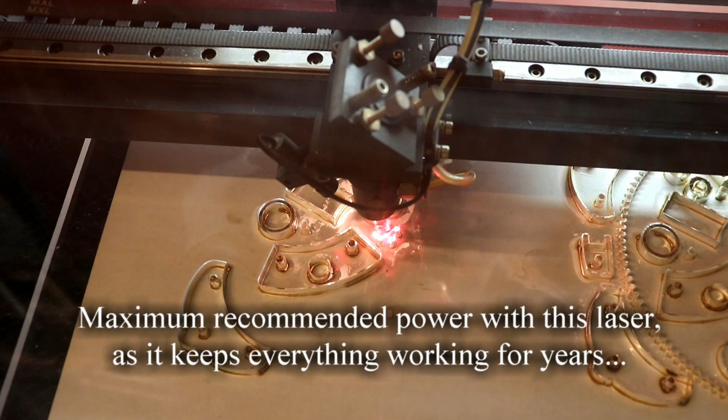The second important thing was resting 10mm acrylic on white card, any old bit of white card, for two reasons. If it's just resting on the honeycomb stuff, cut slowly at 1.4mm a second, 40% power, all the remaining laser shoots through the holes and tries to set fire to anything underneath, including the paint on the inside of the tray. Whereas sitting it on white card is fantastic, it absorbs the remaining laser power and bounces some back, giving a beautifully radiused edge all round. So the bottom half of all these bits will have edges slightly radiused.

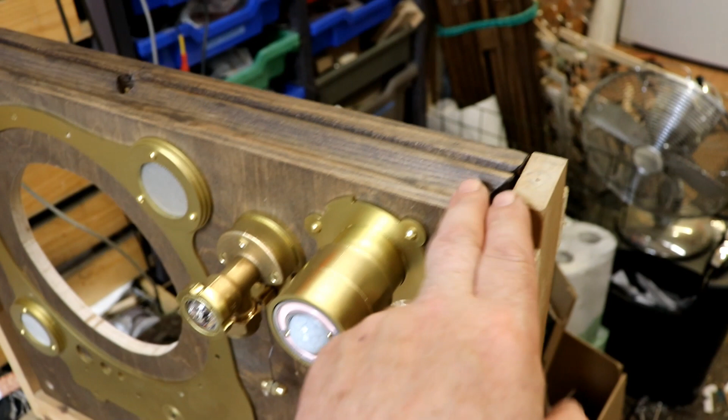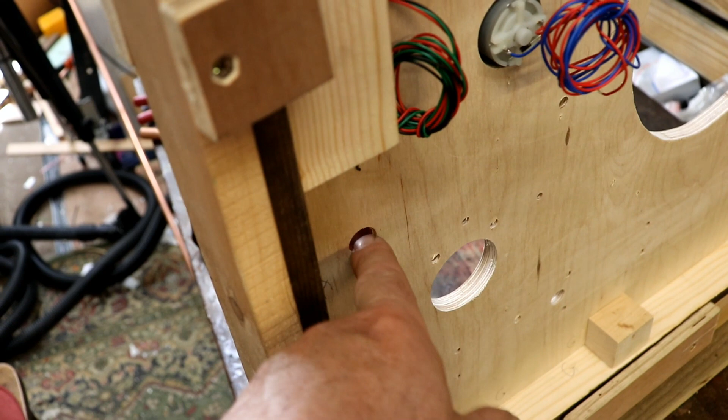In other developments, we have vertical barometric prognosticators. I went round the side and retrieved these two supports, which are really handy, because I'm now starting to work on the front and the back. I'm going to put that encoder thing in there, so that's very exciting.

All the 10mm bits are cut out, and I can't remember what any of them do really. I'm figuring it out very slowly as I go, trying to work out what all these little spaces and things are for. I'm just going to use one of them, which I think needs to fill the gap between the copper pipe and the clock body.

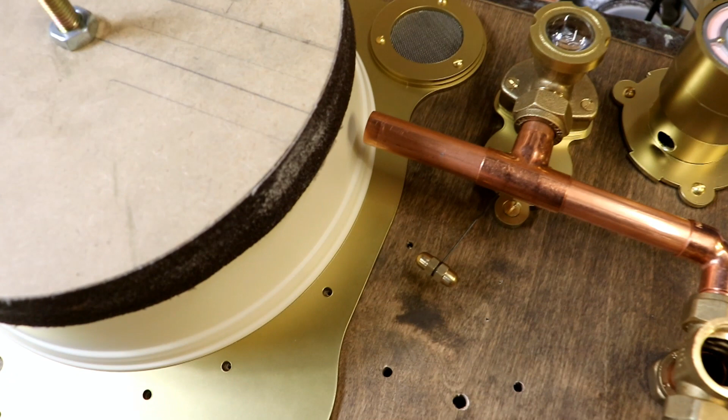But I have a jig, as always. Here's the jig, a disc with the same profile as the clock. I've marked it on, lined it up, and I can see that's absolutely perfect. So I can sand the profile I require on there, and line it all up with another part of the jig. Lots of jiggling about, excellent. I'm going to clamp that down, get it all lined up, and get back to you.

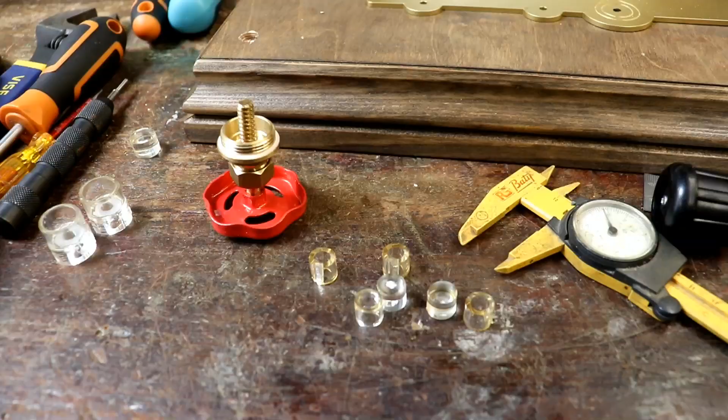Talking of sticking things together, which I wasn't, I've remembered how I'm going to support this on the end of that copper pipe to sand it. I think I'll glue that bit on. Also, the outside of this is just the right size to put one of those nuts on to hide the join, so to speak, which is how I did that one there, where the copper just goes into the board.

Right, and then making the adapters, the linkages that will link the end of that to the switch, which is buried somewhere down there. I've just done that math, and 13.8mm is the gap between the end of that and the end of the switch.

And now I've found all these little bits of 10mm stuff. There's a circular one that fits over that, then a solid one which is the link that makes it up to about 13mm, and then the funny shaped one with a flat on it that goes on the switch. You glue those three together, not like that. I'll do that twice, because I'm pretty sure that's how it works. It's lovely when these old memories come dripping back. It's great. Hopefully that will work, and I know they're all small enough to fit inside a piece of 15mm copper. There we are.

I've lined this up. Pillar drills are just so incredible, they really are, so versatile. I've lined that up with the line I've drawn on there. This is then going to spin round. I've taped that onto the end, and I'm going to slowly sand that. Let's try it and see. It's not twisting it around.

I didn't put this high enough, it hasn't done the bottom. Let's just, without twisting it too much. I'm an idiot. Just down the bottom bit. That's it. And then, oh, an idiot. Right, yeah, just enough. Yeah.

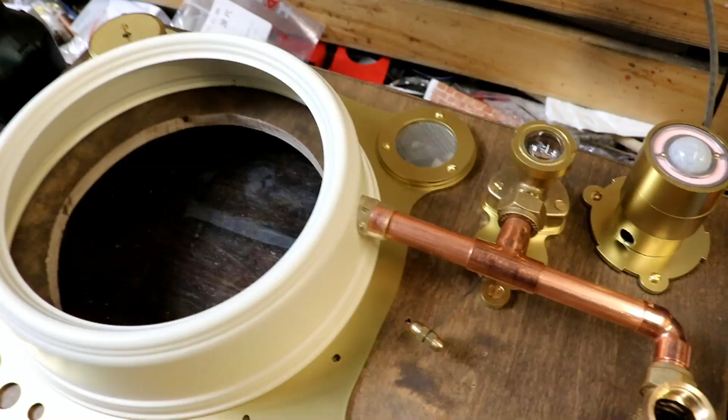Oh. Nah, super glue to the rescue. Just lifted that away, put some super glue on the end of the rubber, up the plastic thing, and then just slowly slid it back together. That'll hold it at least while I can then line up and drill a hole to put a screw through it.

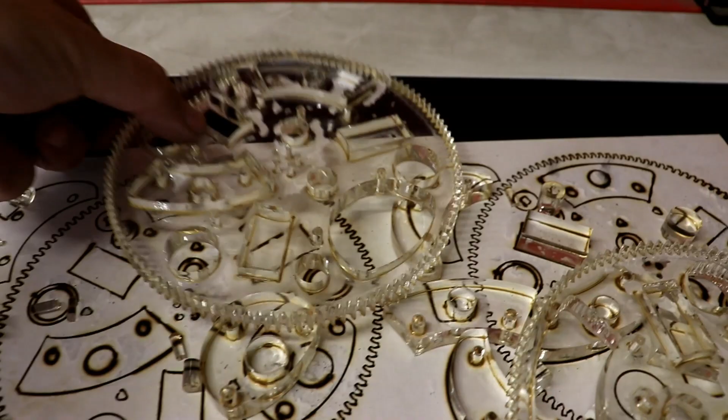Right, I think I need this bit cut out. The reason why it all looks a bit strange with the overall gear, all these bits cut out, is because you don't need them. Two reasons: one, it'd be a waste of plastic because it's not seen. Secondly, it makes it a lot lighter. Thirdly, even, it saves plastic because I can cut all the bits out of this unseen part. Makes it lighter for the motor to turn as well.

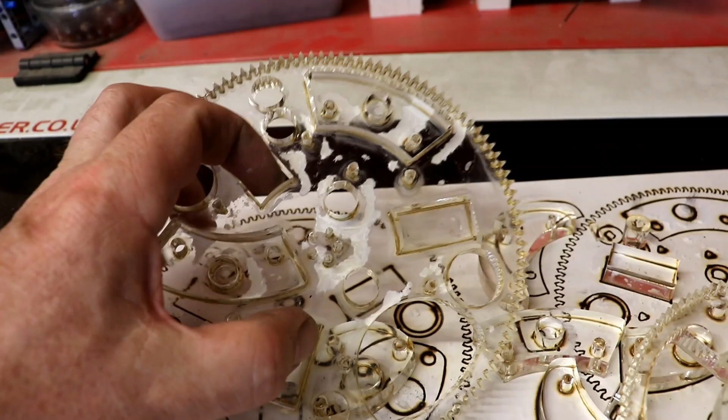These three are for the clamping into the jaws of the chuck on the lathe. It's a cunning plan. Right, let's, oh, I've lost it again now. Show you what, oh, here we are. Show you what this bit's for.

It's just so nice, I can't tell you. To finally have got back to where I was when I first got the laser cutter, being able to cut really fine things, just simply because I got too clever changing all the different bits and pieces, and it was absolutely ridiculous, stupid. Whereas just setting it to cut once on a bit of card, it does it perfectly.

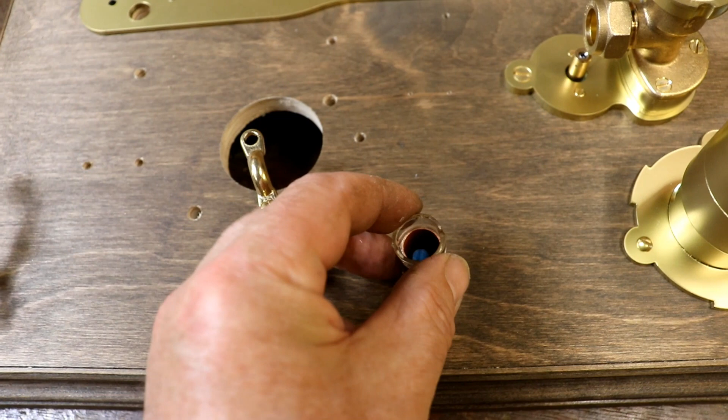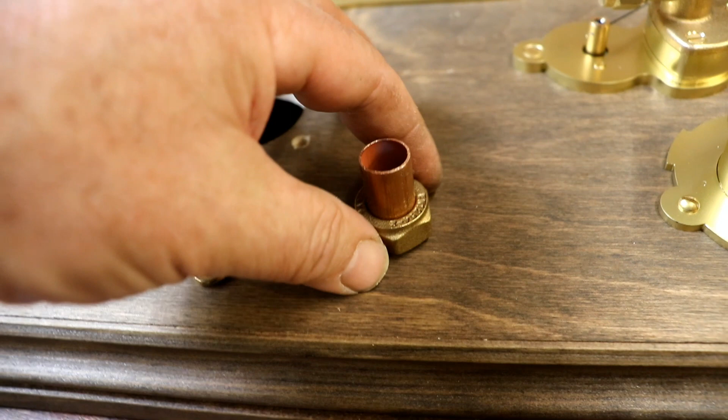Here's the bit. What's it for? Well, I haven't done this one yet. Look at that. It just, oh, the joy. Just pushes on firmly, and then that pushes on firmly over that, and I'm going to glue it together as always with wonderful super glue.

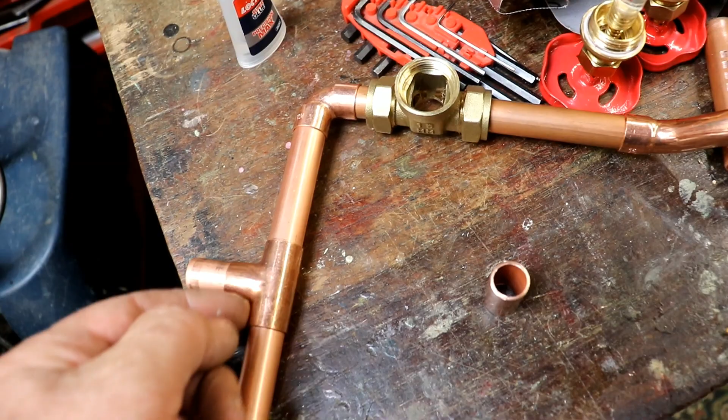And in fact, that's what I'm using to glue all the plumbing together for all the machines, actually, because it just makes it so enjoyable. There's really no point in getting a blowtorch out and solder and flux and all that. It's lovely because you can line it all up, just drip some super glue in the end of the fitting, and then just push it in or twist it or angle it a little bit before it sets, and it really does make an extremely strong joint.

Now I can put the tap together. I've got all these tightened down temporarily, so there we are. You can see I glued that onto the spindle bit, which sticks really well. I'm not going to glue that because obviously you may want to get it apart to repair or replace, and it's very important not to end up designing stuff that you can never get into again. Let's put that on there, tighten that. Yep, that's really nice, and the slight little bit of slack there is really good because it means that the switch positively clicks even if this is a bit stiff.

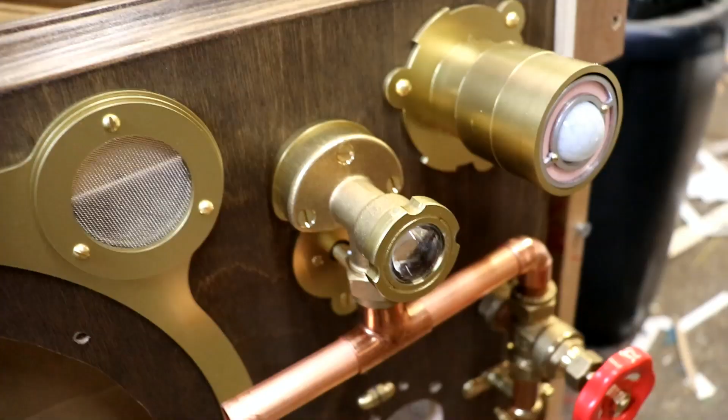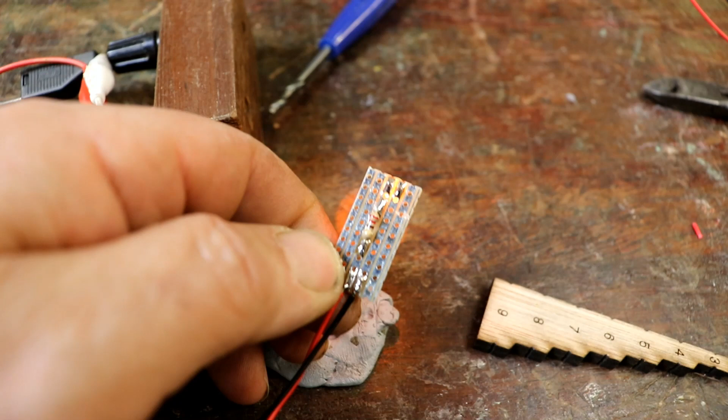Now to get some illumination sorted out for the power on indicator. And here we have it: a flickering amber LED on a little bit of Veroboard with a resistor, 220 ohm resistor, to run it from 5 volts. You can see actually it projects quite a nice beam.

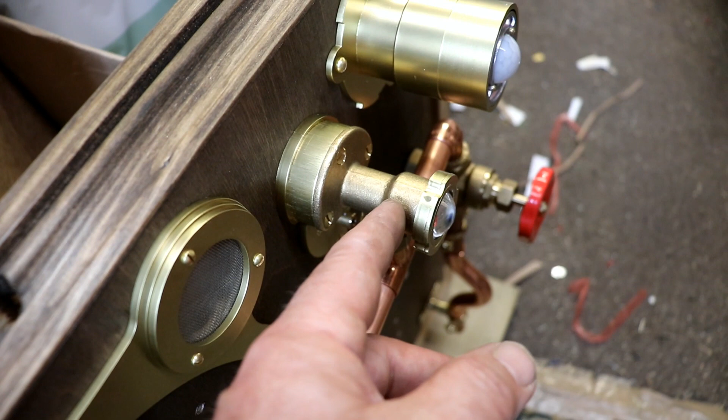I discovered that for the power indicator, if you think about it, I've got the lens at the front, I've got an opaque white disc glued in there, and then at the back there's an oval, and I'm going to fix that there because I found that projecting it onto the white disc that's inside looks really nice through the lens, and I'm going to glue that on.

In the past I have actually used a screw, but I think, you know, if anything goes wrong with this, I'll just prise it off. Although all the ones that I've ever installed or created all continue to work, at least this bit does, so, well, all of them do actually, I will glue this in place.

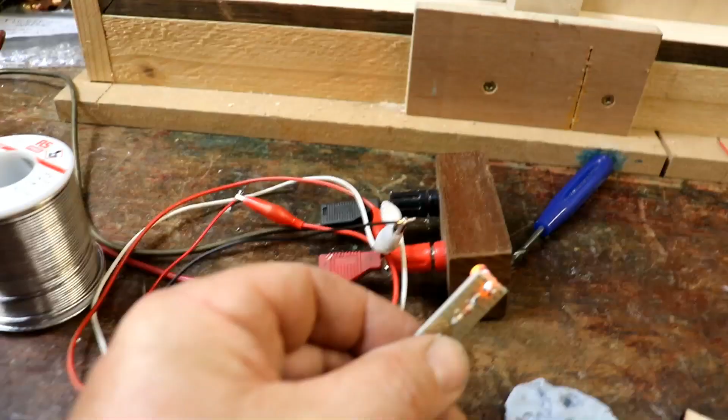Oh, and the reason I've connected it up just to check it works is it's always a little bit doubtful if you solder too close to the actual LED itself. If too much heat gets on the wires, they can melt and then break the connection inside. The other amazing thing about these flickering LEDs is they've got a little integrated circuit in them, a teensy little black speck that you can see if you look closely, and that's got a load of random numbers stored in it.

And that tells the flame as it cycles through, switching on, switching off, and the brightness and other things.

Absolutely incredible. I remember seeing a YouTube video, I can't remember the address, about someone who'd actually cut one open ever so carefully and analysed what it was actually doing.

It's incredible. So that's glued on. Let's have a look at the other side. And there we have it.

Beautiful. The amazingly funny thing about electronics is to try and get something irregular is really difficult. It involves things like storing lists of random numbers, because it's all so reliable and predictable, or should be at least.

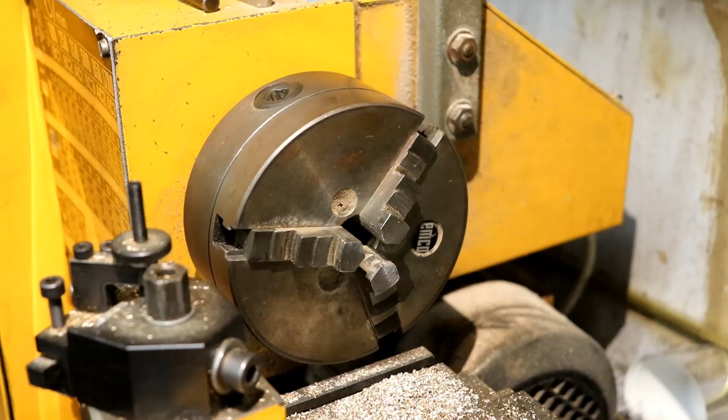Interesting. Now the next thing is to make the bearing supports that guide the Scotch yoke backwards and forwards, and I was so pleased when I realised how to do this.

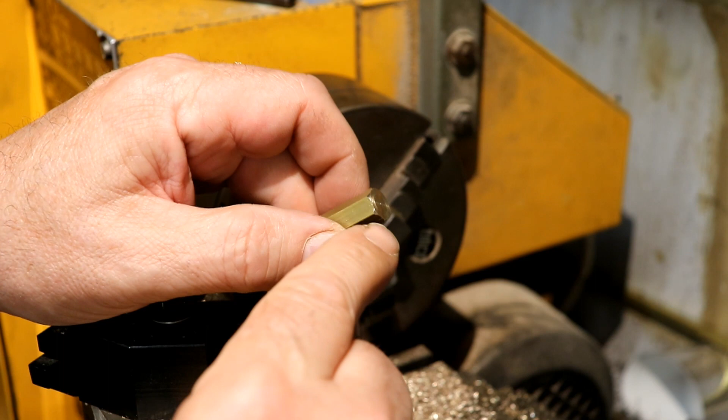Here's a fresh one. I've obviously parted it off to the right length. I've just touched it around the corners there, so it just makes it look nice and takes the sharp bits off. Rest that in the lathe, in the chuck.

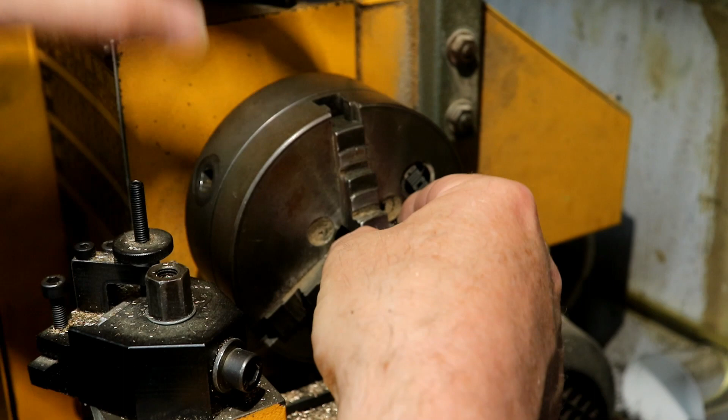Put the washer on the top, one side. It sits very nicely, and then tighten it. That's it. Then I'll get the 3.3mm drill, which is the right size for tapping an M4 hole.

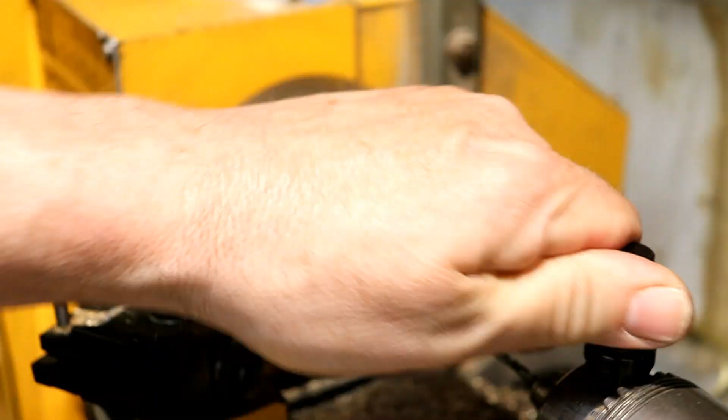Put my spectacles on. I'm going to put the M4 tap in here and do a squeaky bit. And there you have it.

Thank you very much. Now on the other end, M5 holes, tapped holes for the bearing support. And there are the ones I've got done so far.

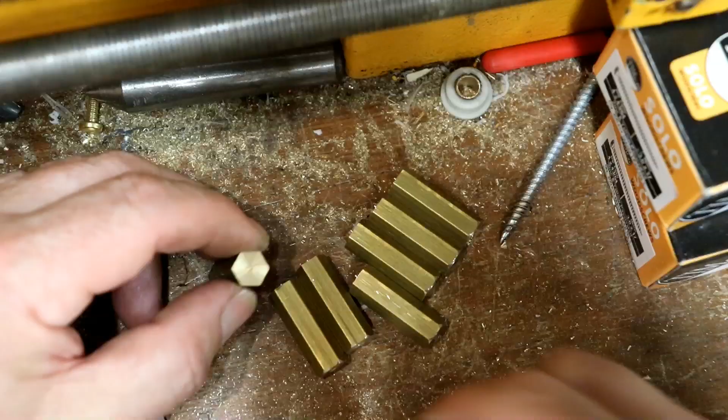They've all got the offset holes, so now I'll do the M5 holes on the other end to support the bearings. Oh, there's another one there. The wonders of a centre drill, because you can see there's a little bit that sticks out where I'd parted it off.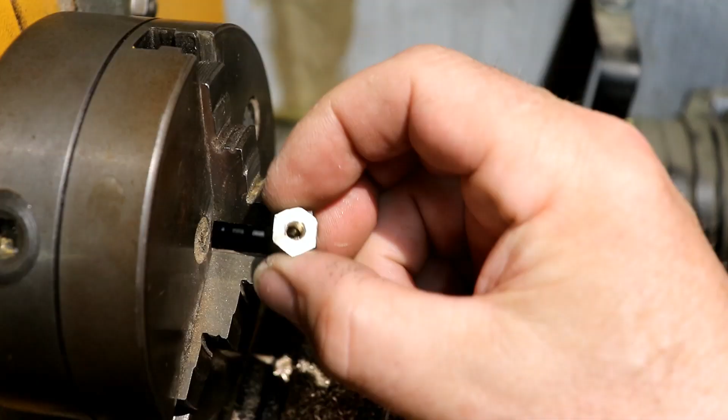There we are, a lovely M5 hole. Just got another 8 or another 7 to do.

The next thing to do is to assemble it all. So I've glued in an M5 stud sticking out 12mm, and I put a 1mm M5 washer on, then all the lovely grooved bearings, and then an even lovelier M5 dome nut.

Look at that. It just looks so lovely. Can't beat using real metal. That's fabulous. I'll get the others put together and then we can fix them onto the actual bases.

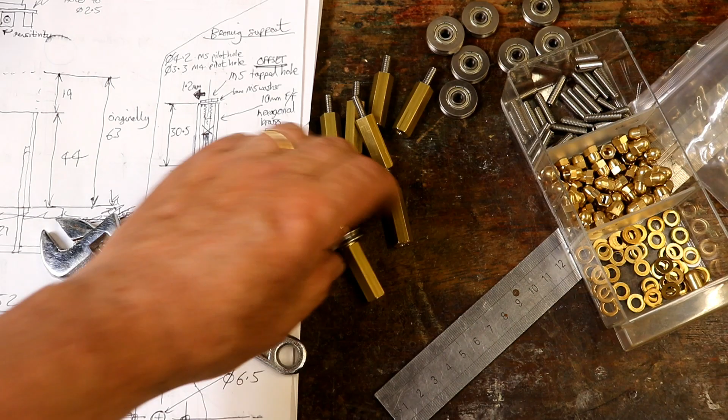Got them on. They look very nice indeed. As I say, that's what's going to guide the Scotch yoke that will control the pitch of the flute.

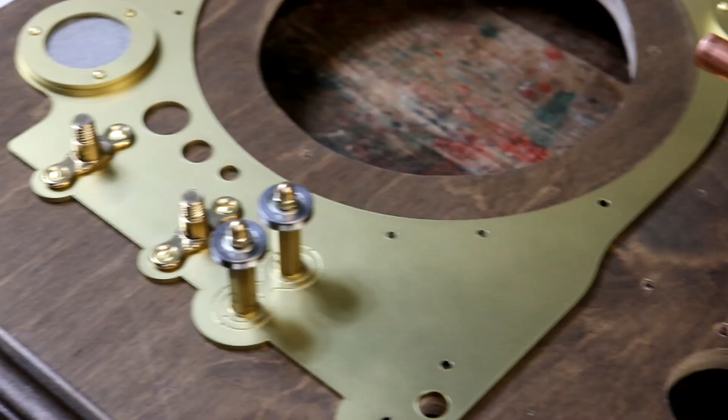Now the next thing I'm going to do, because I fancy doing it, is to add the 8mm plumbing, and that only comes in a roll. It's very malleable, it's soft and softened copper, from some experiment I was doing ages ago.

So I've straightened, hopefully I've got enough left, straightened some out, and I'll cut that into the necessary lengths according to the plan. That's very exciting.

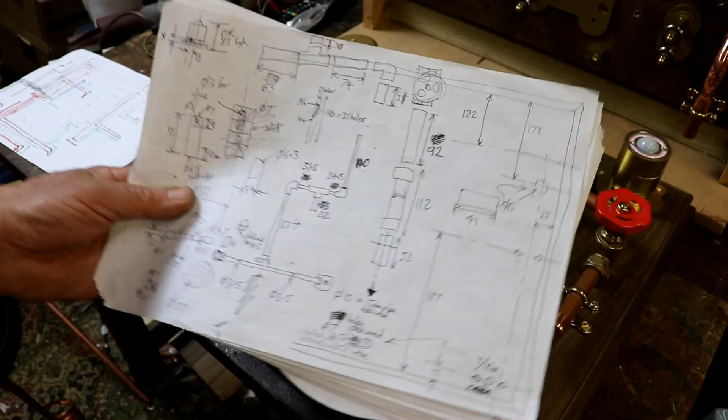And then I've got these little 8mm end feed fittings to connect all that up. There we are. The 8mm copper pipe is on, that connects that to there, comes down ready to connect to the motor, or at least look like it does, and then comes down here and disappears through an eyelet.

And what's in there is a reed switch. Fabulous. Sitting on a thin strip of Veroboard that's insulated either side so it doesn't actually touch the metal at all. The purpose of that is, as the wheel goes round with all the writing on it that controls the pitch, there's a magnet on the back that comes round to let the Arduino know where it is. Lovely. I've also added the bit across the bottom, which is going to have little bobbly bits.

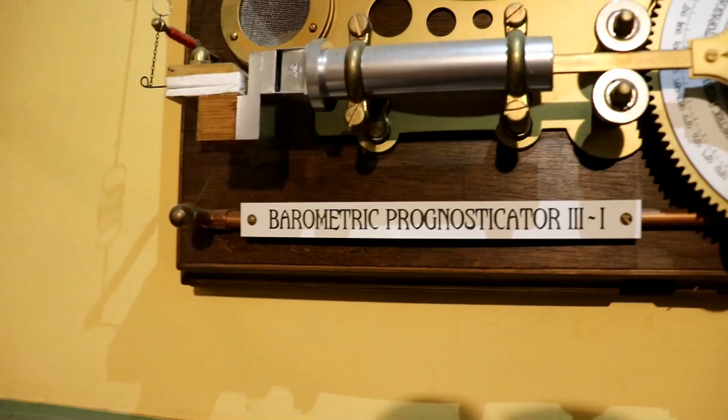Nice dome nuts. It's going to have the engraved name on here, so get ready to do that. Oh yeah, and these have arrived. The keyhole fittings are like this. I only had one left before, so I had to order some more.

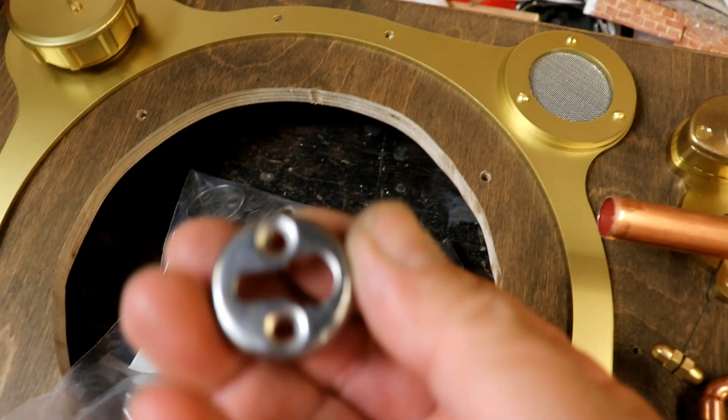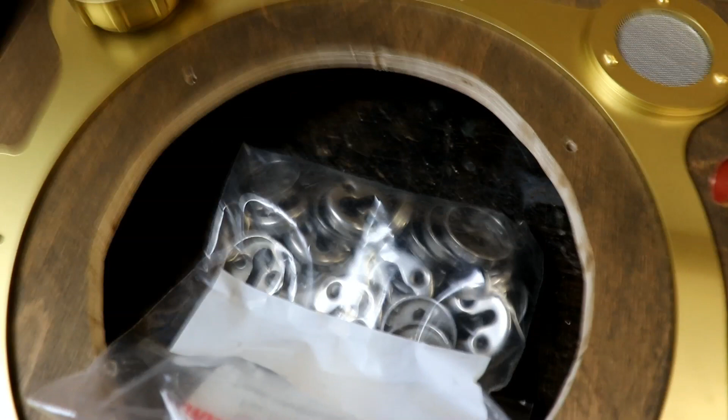Really good, very useful, 30mm diameter, so you can rebate them if you need to. Very effective, although the top tip, if you're looking for these - which I spent ages looking for - reasonably priced, they're actually called, these are from Locks Online Limited in the UK, bed fitting capsule, 30mm bright steel. That's what they're called, who would have thought that, when they sell them as a way of putting bed heads on and fixing beds together. But that's what they are, and they're so much cheaper to get these ones rather than other sorts.

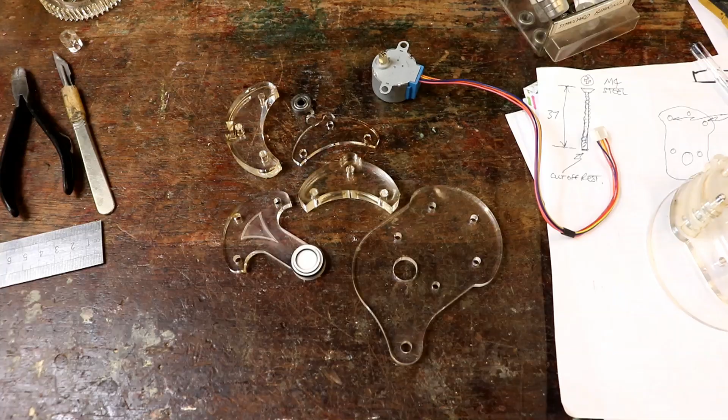Here's an interesting problem. I've got to turn all this into the drive system with the big gear in the middle, and the problem always was I had large screws like this coming right through the wood, up through this bit, through the 4 layers actually - 1, 2, 3, 4, 5 layers - and this bit holds a bearing, a 30mm diameter bearing, in fact one of those.

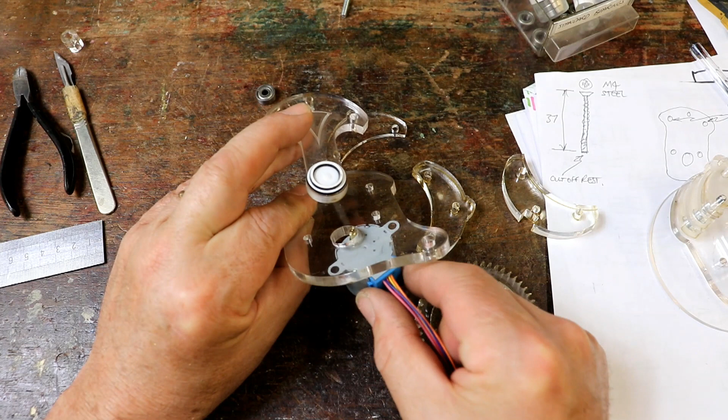And then there is a drive shaft that runs from this top bit - let's try and hold this up - comes from this top bit down here, has the big gear fixed on, and then ends up on the motor, little stepper motor underneath. And the problem always was getting these two lined up. I thought I was being very clever by having a little bit of movement, a little bit of give, so I could get it all adjusted nicely and then tighten it. But it took ages and was really hit and miss.

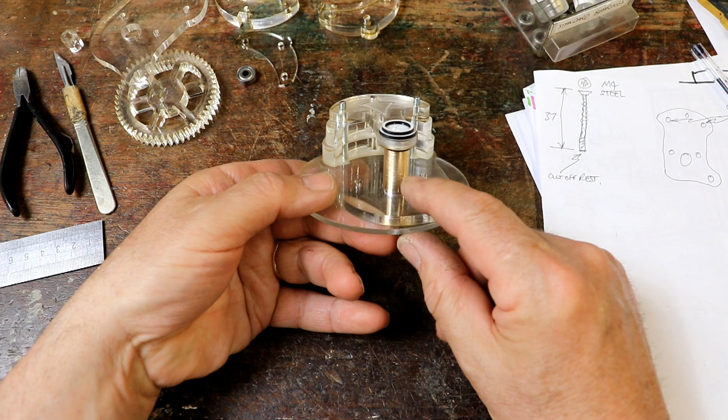So, dear friends, a jig. Look at this, just finished making it. There's a post cut really precisely on the lathe to size, so it fits through the laser cut hole here, which is a clearance hole. This just rests down, slides down on it. It's also got a little pin sticking out the top that goes into the bearing in this top bit.

And it is beautiful. I've also decided to simplify matters by using 2 countersunk screws. It was a bit confusing looking at this, but 2 countersunk screws there and there to hold and clamp this together while it's on the jig, possibly also add some glue, and then that leaves one pivot screw that's going to go right through into the baseboard, and another one here. That means I can then adjust it to get the gears to mesh properly.

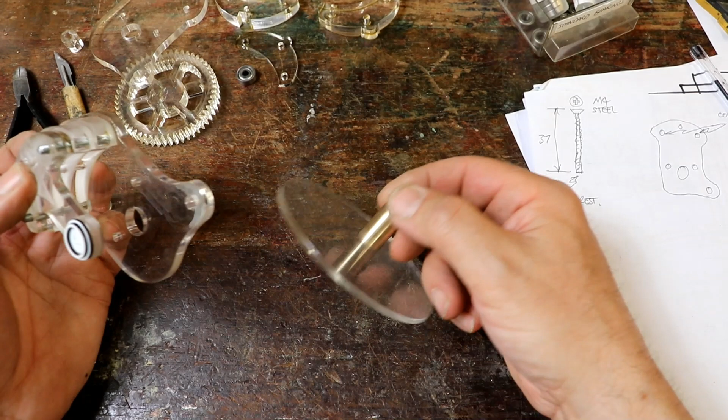Oh, there we are, you can see, that's what I'm talking about. It's taken me a while to do this, to get all the bits and plan it, think about it, cut it and everything, but it's one of those things that is going to make this so enjoyable, because now that will not move at all. All these bits can move a little bit, but this will be absolutely vertical. So I'll get on with it.

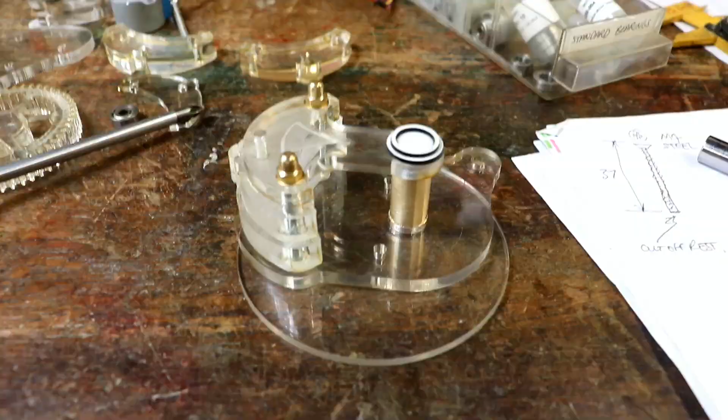It's exciting, this is working really nicely. I've just tightened them down, the 2 dome nuts, and now I can spray that up. That just lifts off, which proves that it's all lined up nicely. That's a joy, and then just having to adjust it with 2 screws rather than 3 or 4. Oh lovely, I'll go ahead and put the other one together. Looking great.

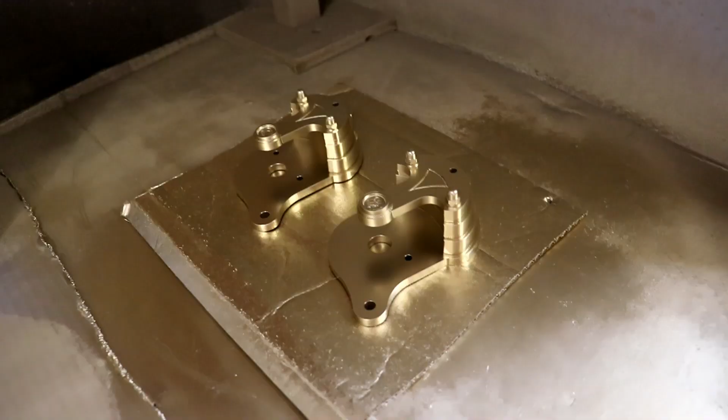Fabulous, and I've just worked out why there seems to be one laser cut lopsided hole here. The reason being that I cunningly designed these 6 spoke bits so that the lathe chuck would grip it properly. So now I can drill a perfect 12mm hole through the centre, and then that little hole will be where I can drip the glue in. It's all coming back to me. Definitely a job for the centre drill.

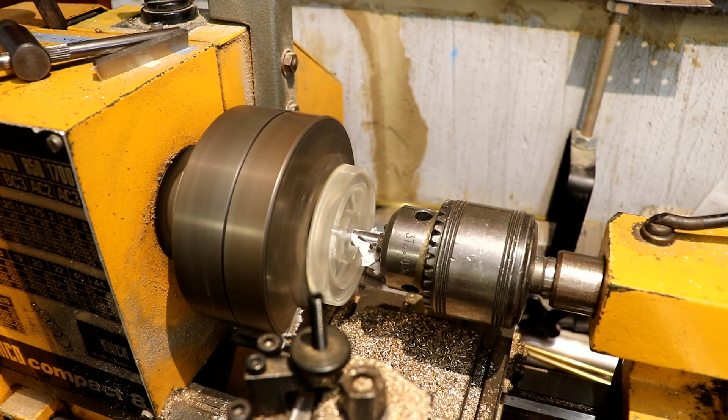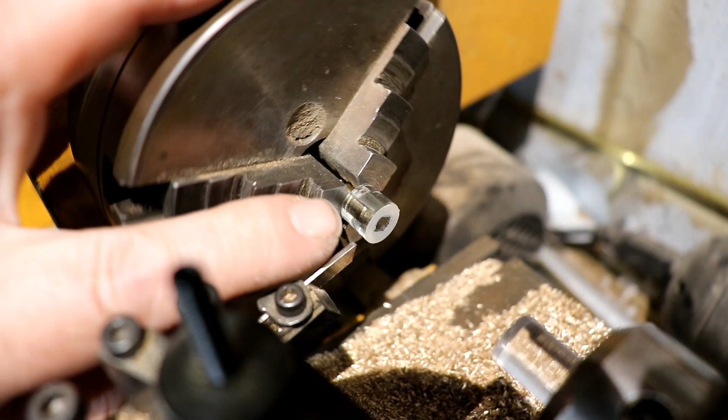I thought it was worth mentioning this for those of you who want to use those little stepper motors. I took the shaft out of one of them that was broken for some reason, and I used that as a little support jig. So I cut these out - there's one, where's the other one gone so I can show you - from 10mm acrylic, with the same shape, the right size shape as the drive shaft on the stepper motor. I jam this on and then just turn down, flatten off the end once that's pushed up nice and tight. I've got a bit of 12mm acrylic here that I've already skimmed the end of, with the parting off tool.

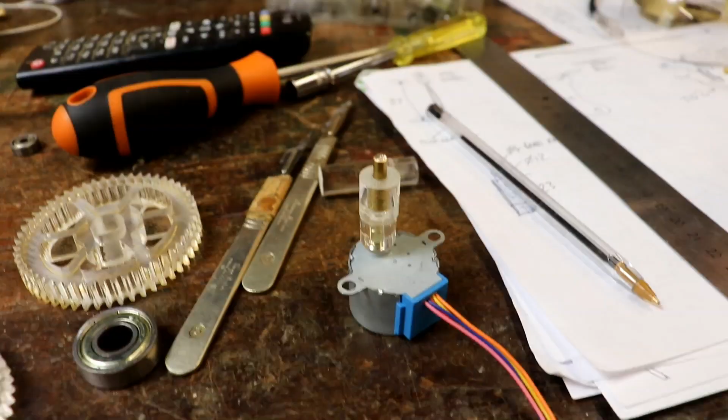So this is what I'm talking about. There's one of the drive shafts. That's the important diameter there, but as you saw, they're all lined up perfectly. That fits on and engages with the spindle on the motor, and there's a little brass pin sticking out the end, which just needs gluing in.

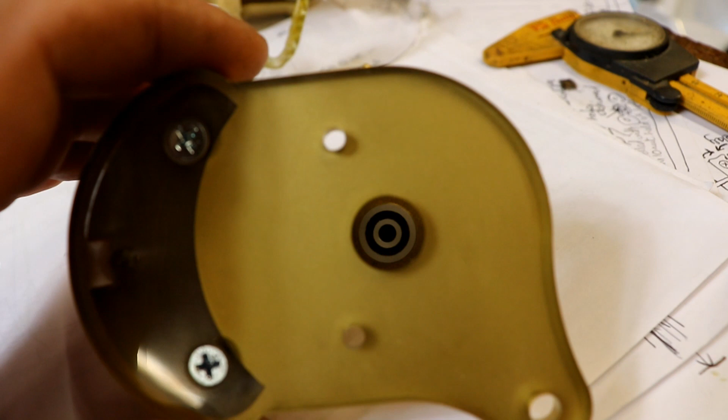Very carefully, I hasten to add, a couple of plastic or nylon versions of the 13 by 4 by 4, or whatever you call it, bearings. There's no point in using metal ones. These ones I've had for ages and are absolutely beautiful, and they're going to be hidden away inside, so that's okay.

So that's what you end up with. The motor will screw down here to the base, and I can just glue the gear on. I think it's 10mm above this inside bit, and it will be supported beautifully by the bearing within the motor and the bearing within the top bit.

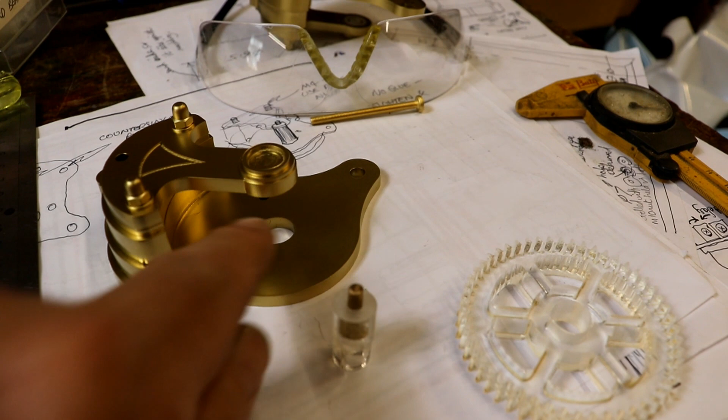This is what I'm talking about, catch-22. I've just realised that when I've glued that on there, I can't get that in there unless I loosen this, and then that completely defeats the whole idea of having the jig. What does occur to me though is I could cut a slot down here and then just slide this and offer it up. That would solve the problem, or even having this slightly oval would solve the problem.

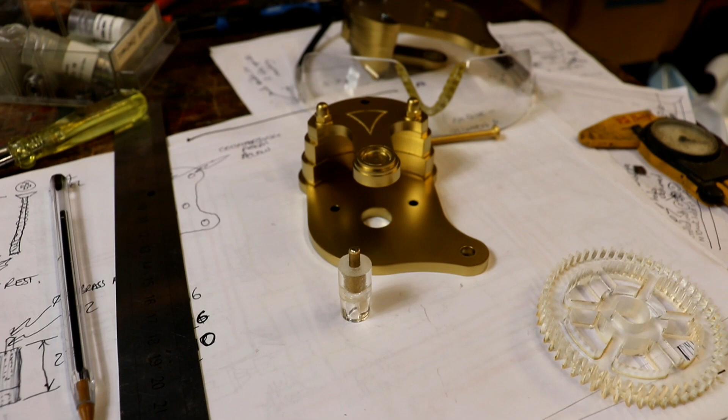I'll have a little think about it. It's this sort of thing, so many improvements that I'm going to make, hopefully to put together accurately. An executive decision has been made.

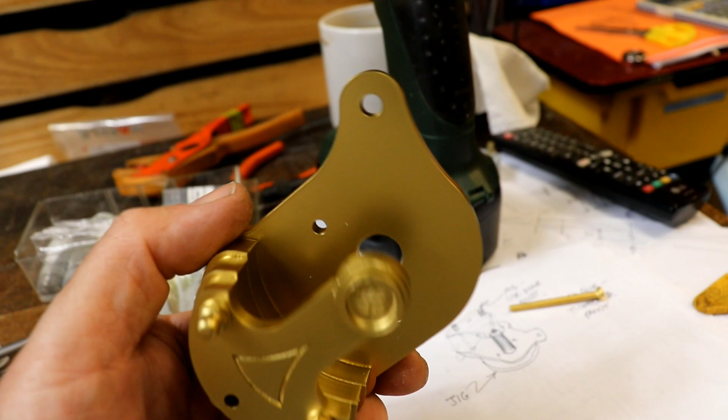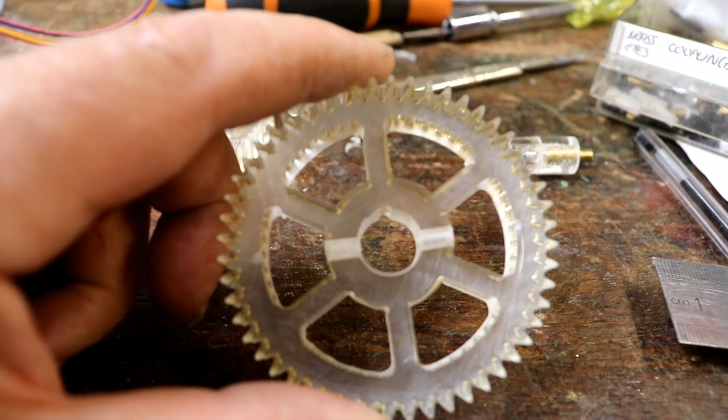I'm not going to cut a slot there because it'll show, and I like the way it looks at the moment. What I'm going to do, and have done, is to tap 2 holes. They're 3.3mm holes, tapped to M4, at the shallowest angle I can get, and then I've got some M4 grub screws, which I can then use to attach this finally here when it's in the right position and all adjusted. I'm really pleased with that idea.

I think I put 2 of the grub screws in just simply because the plastic is softer than metal and it could slowly scrape its way around, but I'm sure that 2 will be absolutely fine.

So that's very exciting. I've got that done with both of them, so I'll get these sprayed up and the shafts sprayed up, and then get the motor systems together.

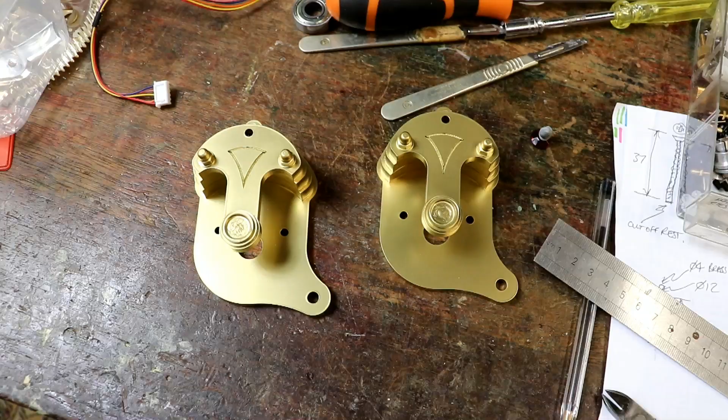While the paint on the gears is drying, I'm going to stick on 2 of these beautiful plastic ruby things that just add a certain je ne sais quoi, with a new tube of super glue. Right, making sure it's not going to splatter anywhere. Then a little drop.

Bit of Blu Tack, which is fantastic for such jobs. Look at that. Just adds such a nice little touch to it.

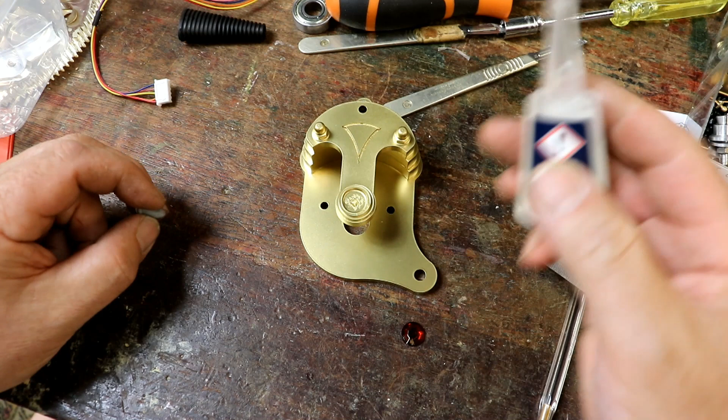As you know, if you've watched other videos, I do like to have, along with the brass and the other wooden colours and things, little red features, like the valve handles, knobs, whatever. Just adds something so nice and special. Right, here we are.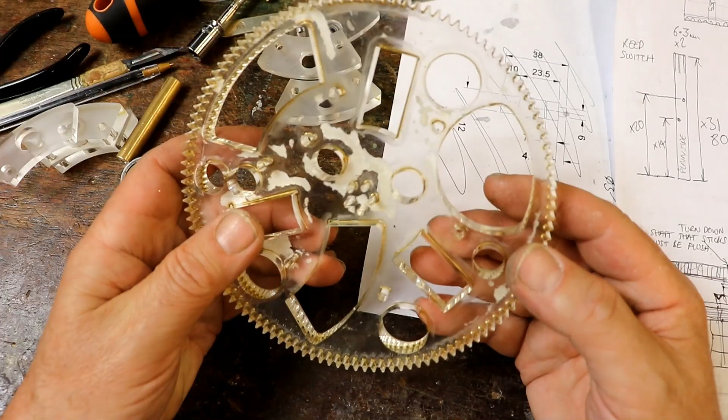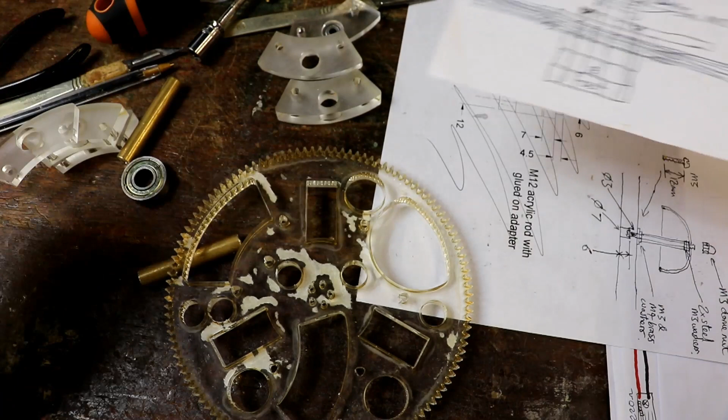Right, I've now come to trying to work out how on earth to mount this. Now this runs the Scotch yoke, so it's very important that it only rotates and doesn't wobble in any other direction. So the way I've achieved it, having been scouring a wide variety of notes that seem to be spread over several sheets and don't make a terribly lot of sense, is I've turned up two 10mm brass shafts and tapped an M4 hole in each end.

On the front of the Barometric Prognosticator, there's the biggest bearing I use, which is that one. That supports the mass of this and everything else. Drill a 10mm hole there. Those 5 little holes I've remembered are for glue.

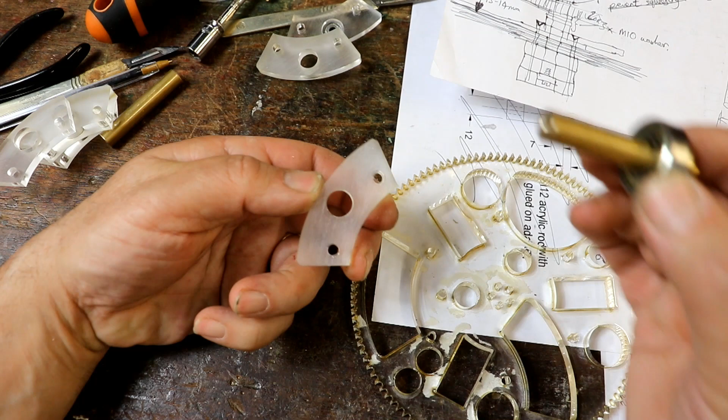That then goes through the wood, and then it goes through one of these funny things, which was actually cut out of the wheel itself. Irony, pathos, I don't know, something or other. Then that goes through there, and then you have a small bearing on the end that it screws into. So when you look at the distance between the two bearings, it's sort of 10, 20, 30 mil between them at least, which is great. So that's going to stop any of that movement.

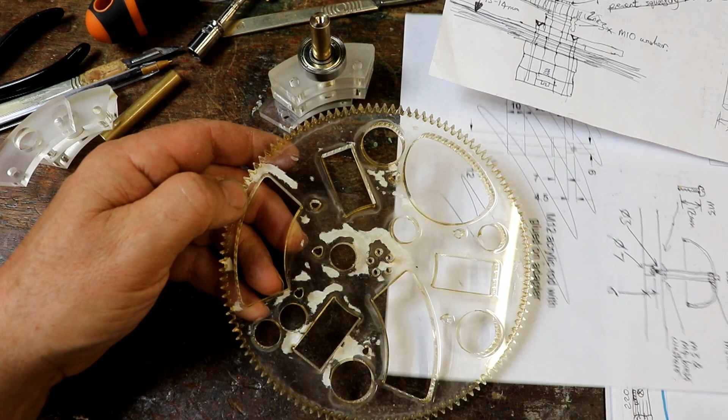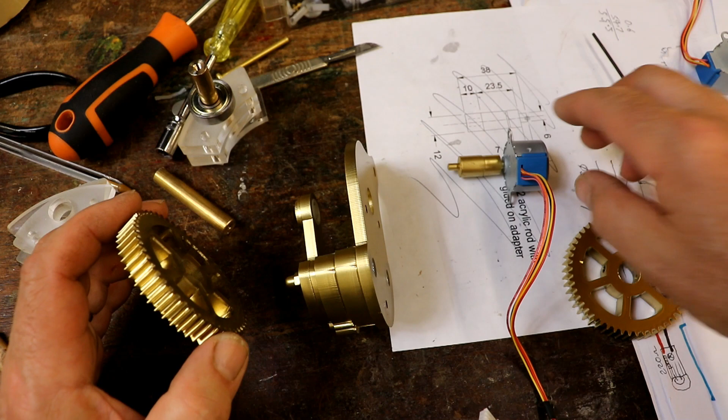Right, I will go and get on with this. So all these holes are hidden by the engraving, which I haven't yet done, and on top of the engraving in the centre there's also one of these that was sprayed up quite some time ago, so it should be dry, so that'll be nice. It's so nice when you come up with a better way of doing something on lots of different levels.

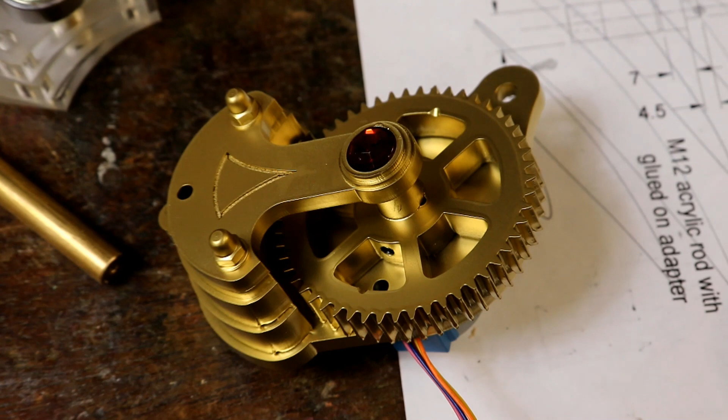Here's the motor with the shaft shoved onto it. Now of course I can put that through there, and then, oh look at that. That then pushes into the bearing. I'll screw this down, then I can just adjust the height, tighten those two grub screws. I'm so pleased, and it looks lovely.

I'm absolutely thrilled. They've gone together beautifully, and because of the slight slack in the stepper motor I can check whether the bearing is rubbing or anything, and it's not. That's just fabulous. Beautiful looking things.

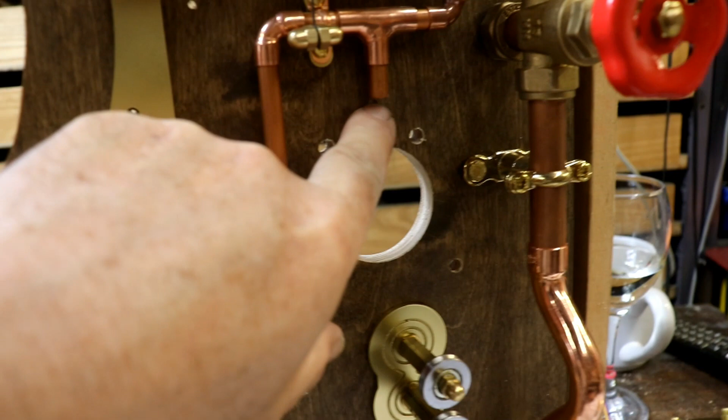Next thing, let's get them fitted onto the baseboard. Now the great thing is we don't need that hole or that hole, because that's where the countersunk screws go. We just need that hole, which is sort of a pivot point, and this one, which is a bit bigger to allow it to move left and right a bit.

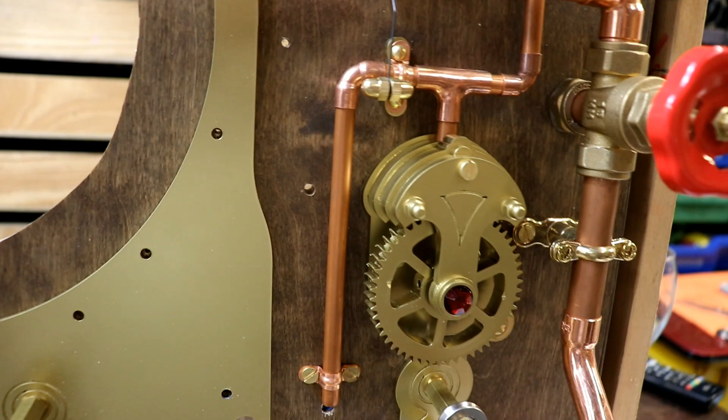I'm so pleased with that. It looks absolutely fabulous, if you don't mind me saying so. It just fits in with the rest of the pipe work. Two layers, small in the back, large in the front. Just every way you look at it, it looks really attractive and interesting, and makes you want to look at it more.

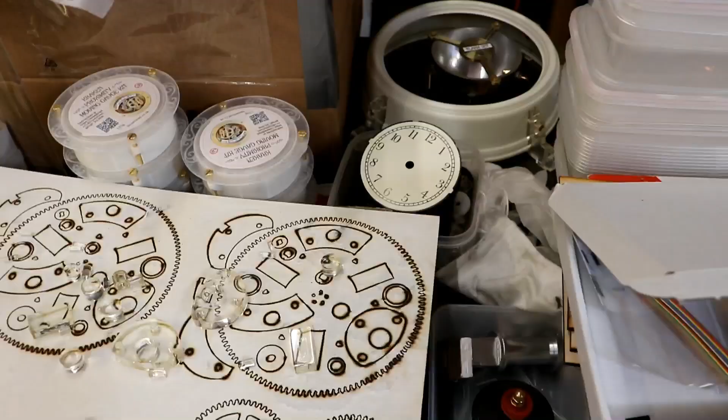I've got these two bits to spray up with brass, and I was thinking, is there anything else? I remembered the bell, the chiming bell. I was thinking, do I need to open another IKEA clock? Then I remembered I had the steampunk time zone clock, and here we have all the bits.

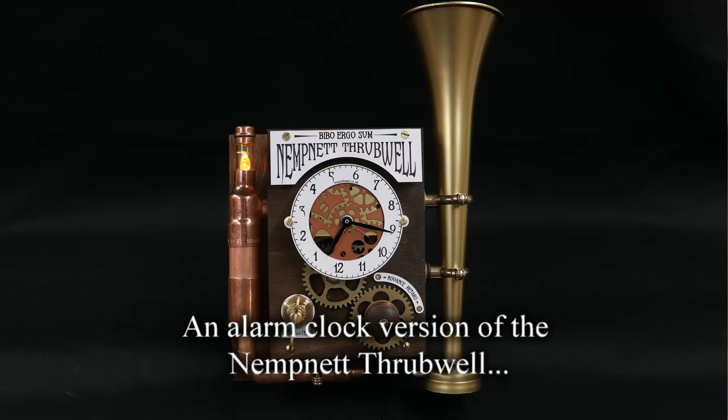I'm so pleased. Took them apart. In fact, I took it apart to make a bespoke project for someone. That's right, I needed the alarm bit for it, the alarm movement. But there are the two bells, and they're like hen's teeth. They're as rare as anything.

So, because they're gloss, I'll sand them down with some wet and dry, and then I'll paint them up as well. I spent hours looking for these online. Nothing, unless you want to buy a special one to replace one on a special clock that costs a special price. But there we go, these will do nicely.

You can see the difference. I've gone over this with 400 grade wet and dry, because obviously it's so shiny. I'm not sure the PlastiKote, even though it sticks like the proverbials with a shovel, it's asking a lot of it to stick to a gloss varnish surface, so just scratching it over lightly like this will make it stick really well.

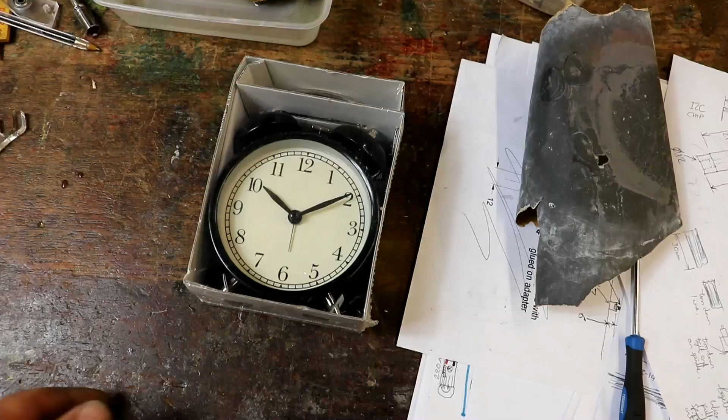Oh, by the way, here is the, what is it, Vertig? Oh, I didn't even say. All the other numbers on, what do they call it? Oh no, it's not Vertig, it's Dekad. And after I found the Vertigs, that must be the big clock, I was thinking, well, I did lots of research and found that actually for £8, as this clock cost at the time, the alarm clock, it works out £4 a thing, and it was by far the cheapest I could find them anywhere. So I bought a load of them. Yes, never a dull moment.